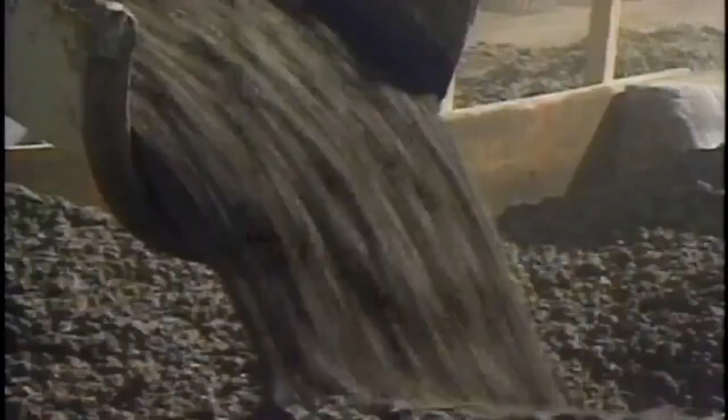Concrete. It's the most used building material on Earth. It was the building block of the Roman Empire. Today, it's the material for a new generation of gravity-defying skyscrapers. The raw ingredients that create this magic formula can be found in nearly every country on Earth.

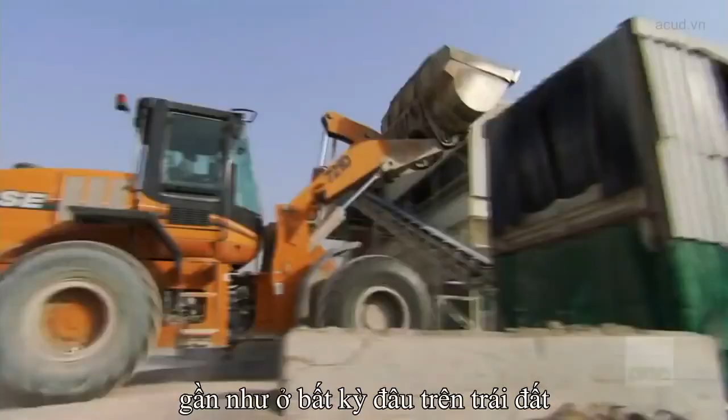Yet how these simple components are mixed together can make the difference between tragedy and triumph. From the mundane to the massive. From the ordinary to the extraordinary. Concrete helped pave the way for innovation and laid the foundation for the world's greatest civilizations. Now, go inside the science of concrete.

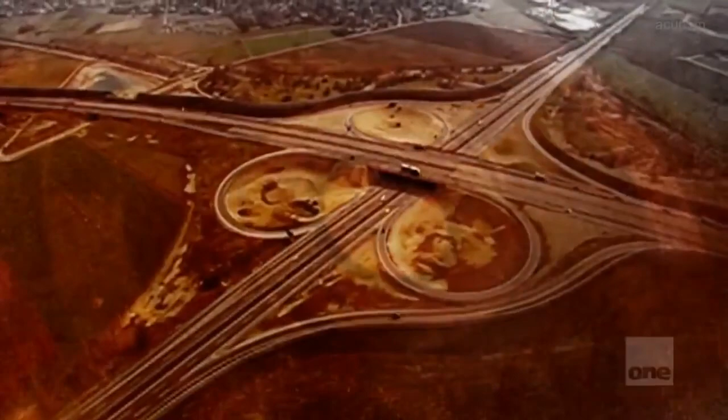It starts out like liquid. When it dries, it becomes stone hard. This amazing metamorphosis has earned concrete the nickname liquid rock. It has served as a cornerstone of engineering for centuries. And it's a highly prized tool of construction for a reason.

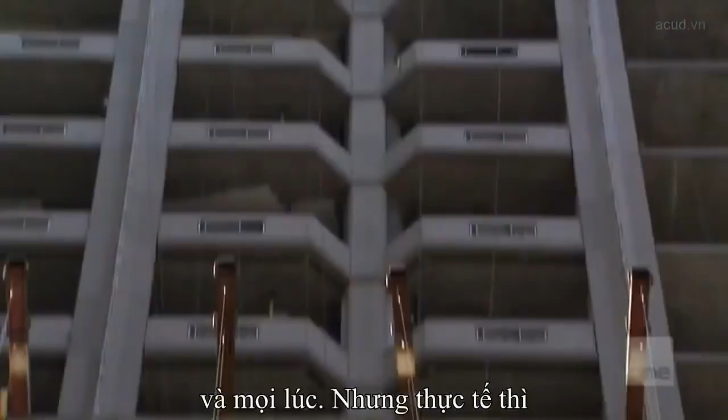It's easy to take concrete for granted. People see it in sidewalks and roads all the time, every day. But in fact, it is the closest thing to a miraculous material in construction that we've ever had. Concrete is everywhere. It has an almost unlimited engineering potential. It can take on nearly any shape and forms the backbone of a variety of the world's construction.

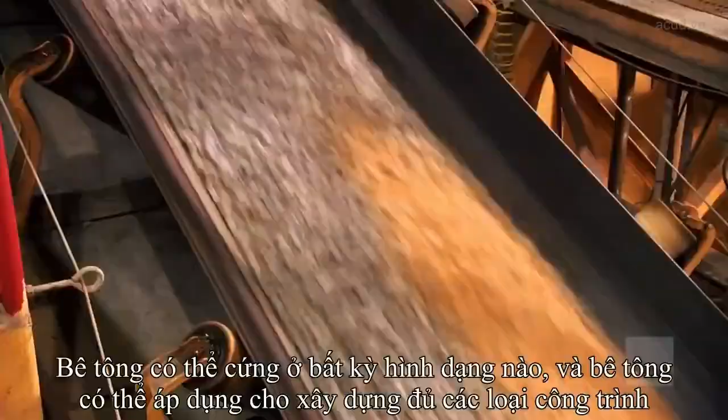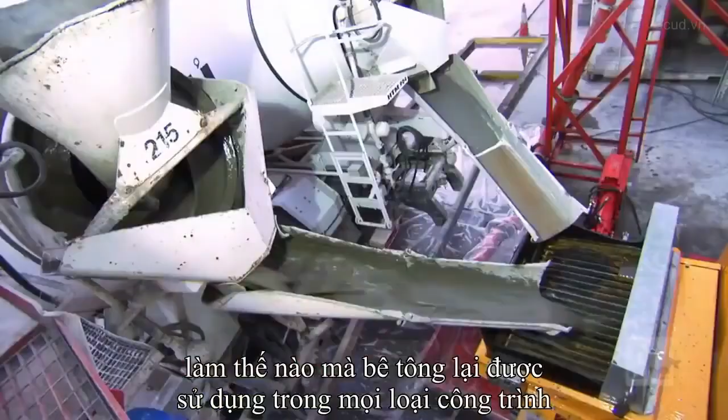Superhighways, massive bridges, man-made waterways, mega dams, the world's tallest skyscrapers. This miracle material begs the question, how does it do it all? I worked on a lot of jobs, and basically they all have a different formula for their concrete. Now I can't imagine the world without concrete.

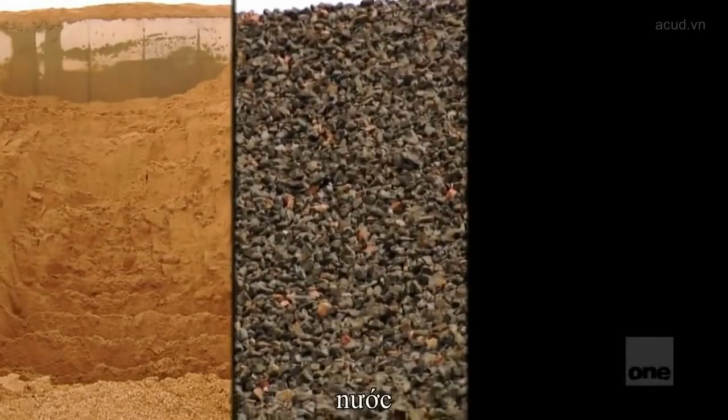The basic formula for concrete is simple. Sand, crushed rock, called aggregate, water, and the heart of the concrete mix, cement. Cement, it is the grey, powdery material that acts as a glue that sticks all of the concrete together. It covers and coats all of the gravel, the sand, and the rock as a way of gluing and binding the whole material together.

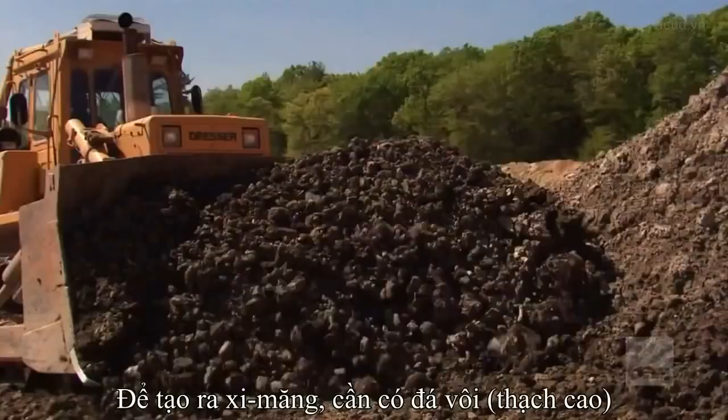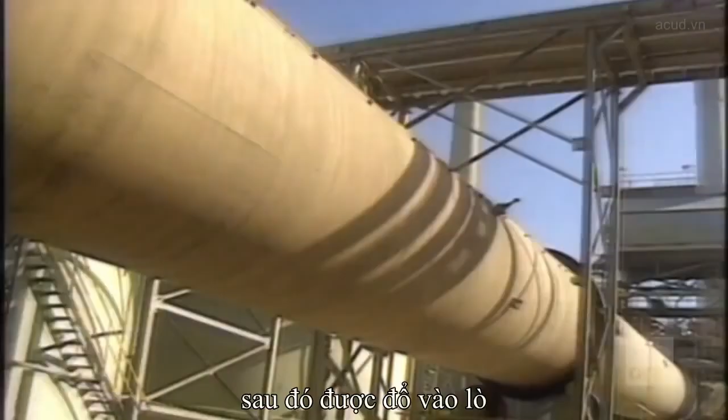To make cement, you need limestone, clay, and other elements like iron. These ingredients are crushed and combined into a powder that's poured into a kiln. The massive cylindrical spinning kilns heat the mixture to a temperature as high as 2,700 degrees Fahrenheit. The mixture becomes partially molten, forming a new marble-sized component called clinker. Once cooled, machines grind clinker into a superfine powder we know as cement.

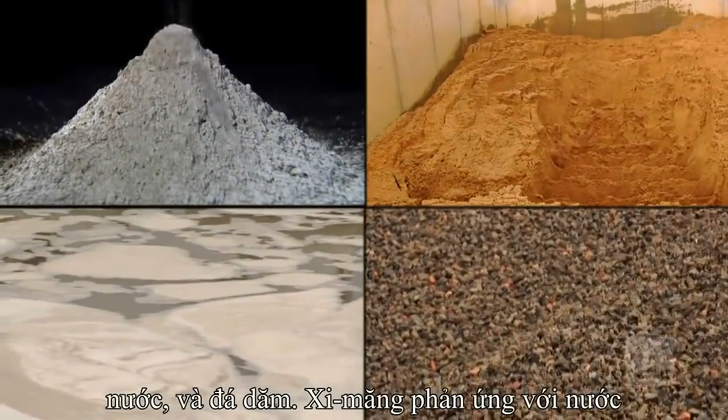Cement binds the ingredients together. When added to sand, water, and crushed rock, the cement reacts, linking the raw elements into one powerful whole. Water is the key. When cement reacts to the water, it undergoes a transformation called hydration. During this reaction, a node forms on the surface of each cement particle. The node grows and expands, linking up with other nodes. It sticks to the crushed rock and sand in the mix. Cement binds these ingredients. As it solidifies, concrete becomes a building block of modern construction.

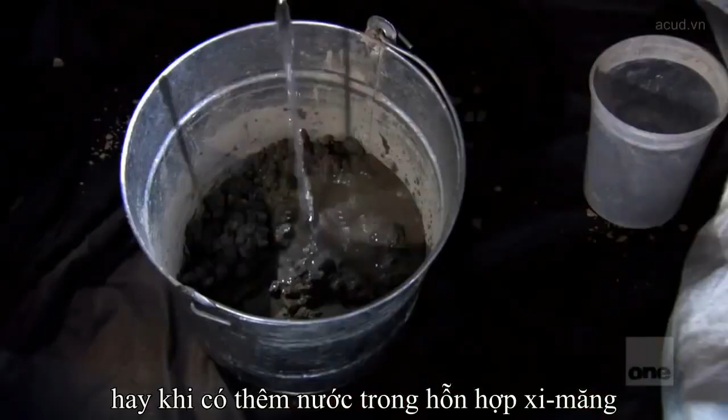The water actually allows a chemical reaction in the cement to allow it to harden. People often think that concrete hardens by drying. It actually hardens by hydrating or getting more wet. The water in the cement mixes with a lot of the minerals and chemicals that are in the cement, and by that mixture forms a new compound which then hardens. This basic process hasn't changed in over a century.

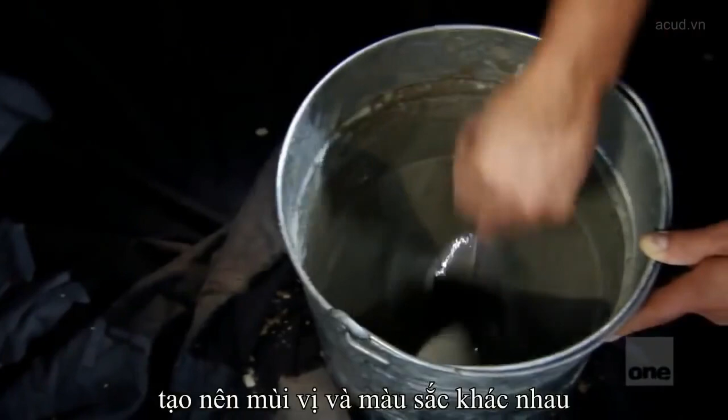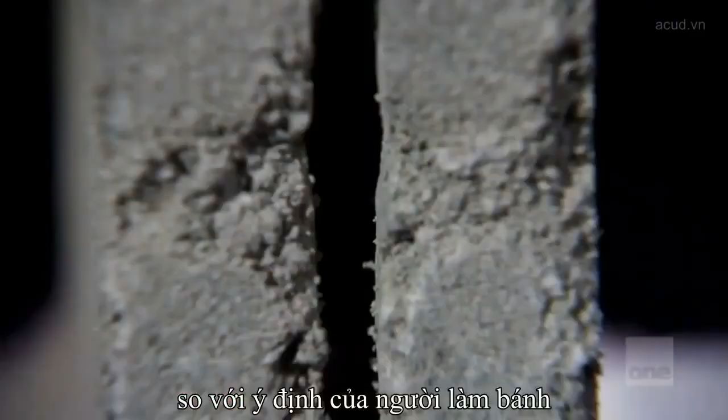But creating concrete is no simple matter. Making the right recipe requires precision and flawless preparation. It is a synergy of ingredients and timing. In a way, making concrete is like making a cake. There are lots of different recipes to make a cake. You get different flavors, different colors, different textures, but there are also lots of ways that you can make a cake wrong. It's not going to set properly, or it can come out in a way that's very different from your intentions. Getting the recipe right is everything, and the consequences of a flawed mix can be deadly.

The residents of Mexico City learned this the hard way. On September 19th, 1985, the Mexican capital is rocked by an 8.1 magnitude earthquake. It causes up to $5 billion in damages. Investigation of the rubble reveals that many of the buildings had been made of a substandard concrete.

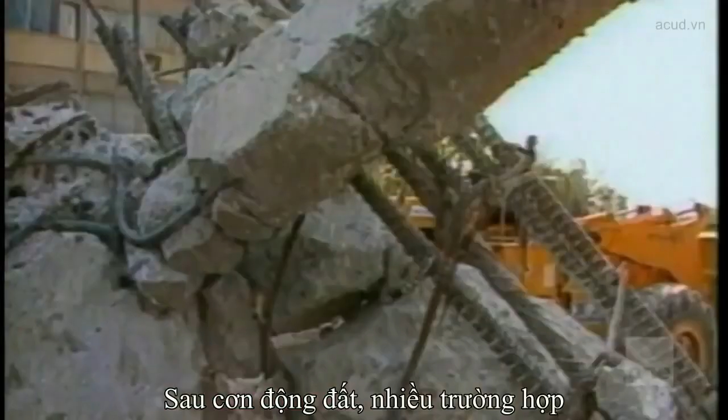Yes, we saw examples after the Mexican earthquake where when you use inferior concrete and you skimp on the rebar, and we saw both extensively in Mexico City, the concrete doesn't have its expected strength. The result is walls would fracture and shear and the building would collapse when the expectation would have been that the building should have easily survived to preserve health and safety. The consequences of this quake are tragic. An estimated 10,000 die. Another 50,000 are injured.

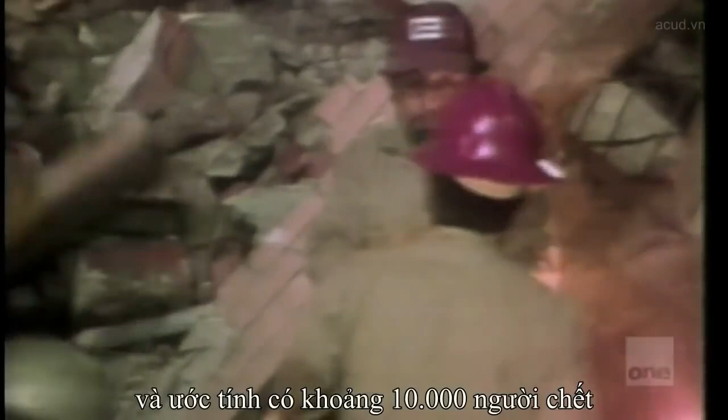But with the right formula, structures made of concrete can endure thousands of years. The ingredients for concrete have stayed the same for centuries. But there has always been room for innovation. With special ingredients and slight adjustments to the formula, concrete can adapt to the challenge of a specific project.

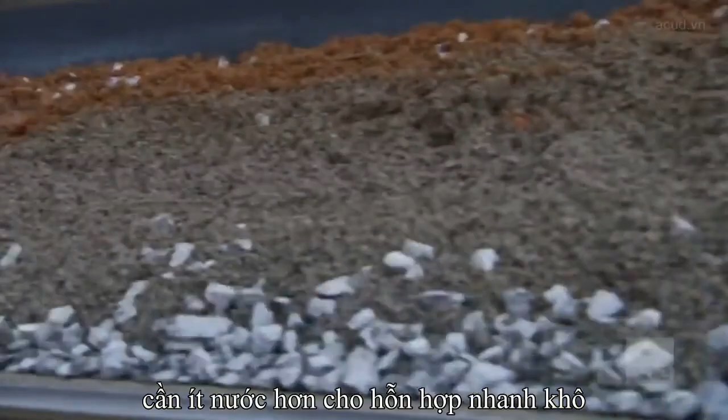Want a dam to hold back 52 million gallons of water? Add less aggregate to the formula to create a concrete with greater density. Want to create the foundation of an epic skyscraper? Add less water for a faster drying mixture. The array of different recipes is virtually infinite. The hunt for the right formula for a specific project is nothing new. The search for the strongest and most durable recipe goes back thousands of years.

Although other civilizations, including the Egyptians, experiment with concrete, the Romans transform it from a supporting material to a main substance. In Rome, liquid rock fuels the dreams of an empire. The word concrete even originates in Rome. From the Latin concretus, it means grown together or compounded. Roman concrete contains the traditional ingredients of sand, water, and crushed rock. But volcanic ash from the hills of Pozzuoli, Italy, transforms the material.

The Romans were very astute architects and engineers, and they recognized that by mixing volcanic ash from Lake Pozzuoli in Italy, they were able to get a concrete that became very hard. This volcanic ash proves to be an adhesive binding agent. It gives ancient Rome a powerfully strong concrete. This innovation allows the Romans to craft an empire from the ground up. Concrete becomes the backbone of a dizzying array of structures, aqueducts, bathhouses, and markets.

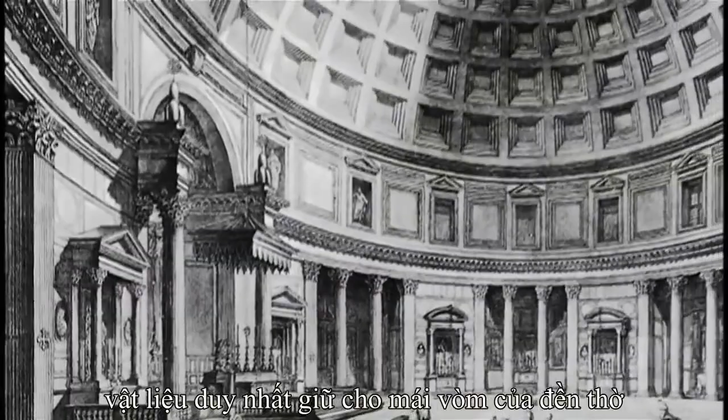This former temple to the Roman gods combines elements of engineering and design, and nowhere is that more apparent than in this concrete dome. Stretching 142 feet in diameter, it is the largest surviving dome from the ancient world. It was the largest dome in Western Europe until the 15th century. Unlike modern-day domes, which are generally reinforced, the only material holding the dome of the Pantheon together is Roman concrete.

Constructing an unreinforced concrete dome on the scale of the Pantheon is just an incredible engineering achievement. You couldn't do something today because everybody would have appraised the odds of your success as so small as you would never get a chance to do it.

There's actually 7 different types of concrete used in the construction of the Pantheon dome. And the way they distributed their aggregate and changed the composition of their concrete so that the areas that had to take tremendous compressive loads, like the weight of the dome at the base, the aggregate is huge, 9, 10-inch rocks. But as the dome gets near the top, of course, there's less weight, so they switch over to pumice. Near the top ring is very high pumice content, almost 80–90% pumice, to make it lighter. It is the Romans' ability to modify the formula for each stage of the dome's construction that allows it to stand to this day.

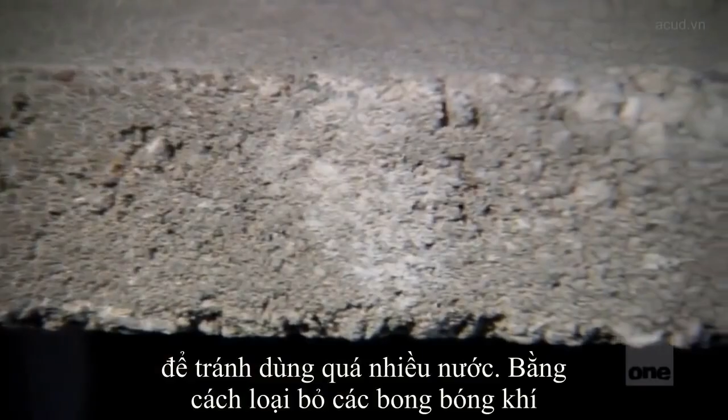The Romans also faced an immense engineering challenge: air bubbles. Pockets of air can form in the concrete during a pour. When the water dissipates, these holes can lead to cracking. To solve this problem, the Romans tamped or tapped the concrete, avoiding the need for excess water. By removing the air bubbles, the Romans increased the dome's strength and stability. The Romans also wanted to reduce the overall stress on the dome. To do this, they created sunken panels called coffers. These panels are decorative, but also take weight off the dome. They are a synergy of architecture and engineering.

However, there is one feature that stands out in the Pantheon's design. The dome's interior was designed to look like the Roman heavens. It features an interior circle called an oculus, or great eye, representing the sun. 27 feet across, the oculus is the source of all light for the Pantheon. The oculus reduces the amount of weight and stress at the center of the dome, giving the whole structure added durability and strength. It is an engineering marvel. The dome of the Pantheon is a stunning example of how Roman concrete could be built to last.

Each layer of the dome becomes less dense the closer it gets to the top. At its weakest point, the Romans designed an oculus which reduced weight and stress. These innovations continue to impress engineers almost 2,000 years later. For 1,500 years, that was the largest dome ever built by man. There aren't many engineered structures that stand that kind of record of time.

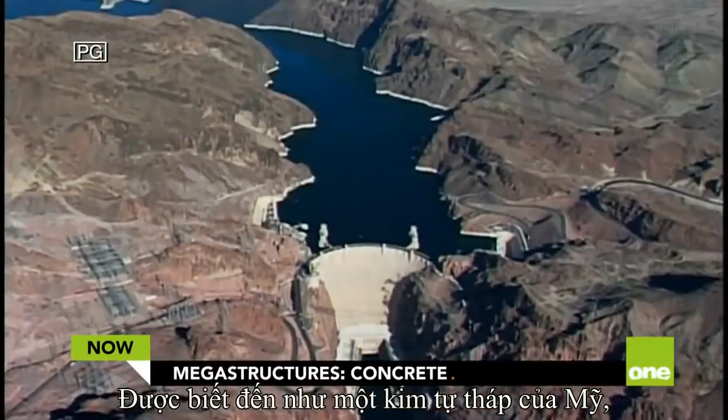It has been called an American pyramid. The mighty Hoover Dam is a testament to the power of concrete. Weighing 6,600,000 tons, this concrete colossus holds back 45,000 pounds of water per square foot. The force of this water generates hydroelectric power for over 1 million people. From the neon lights of Las Vegas to the freeways of Los Angeles, this hydroelectric dam generates 2,080 megawatts of electricity.

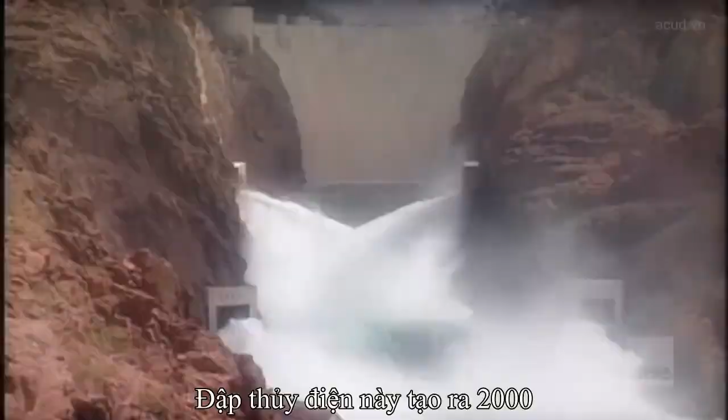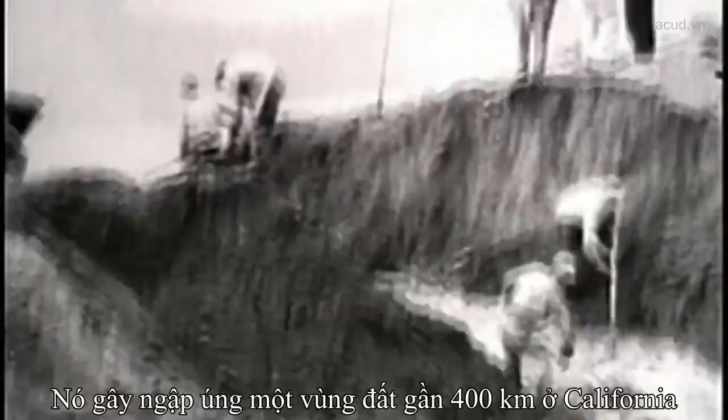The Hoover Dam's construction redefined what the world could do with concrete, but it also rerouted one of America's greatest rivers, flooding ancient canyons, reshaping the area's natural habitat. In 1905, the Colorado River breaks free of a man-made canal. It floods Lower California across 150 square miles. Epic floods wipe out thousands of farmers. Millions of dollars are lost. The Colorado is unpredictable.

The Southwest also has another problem: power. The boom towns of Los Angeles and Phoenix are growing at a rapid rate and desperately need energy. Raging floods and lack of power. Two different problems. But engineers believe there is one answer to both: dam the Colorado River. A hydroelectric plant would harness the natural power of the Colorado and, using simple mechanics, convert that energy into much-needed electricity.

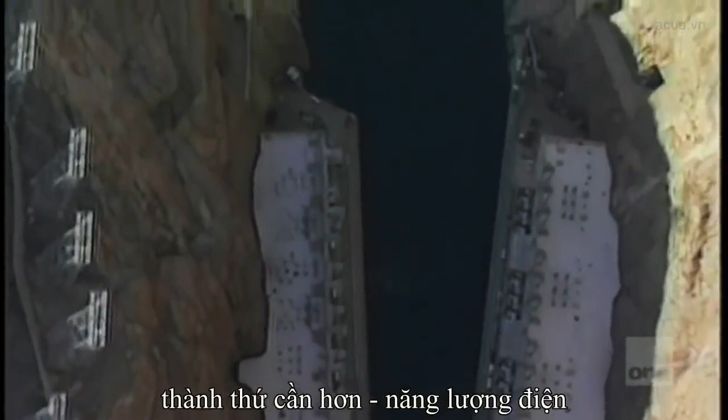You're generally looking in the construction of a dam for a huge, solid structure. It's really about holding back enormous quantities of water. The dam needs a material that is strong enough to hold back the raging Colorado. And since the location would be remote, able to be made on site. One material can meet all of those requirements. It's hard to imagine the Hoover Dam being built out of any material other than concrete. Using steel on this scale would be too costly.

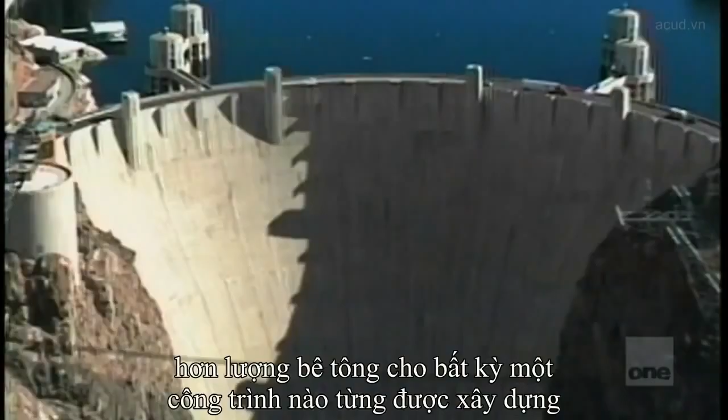But to make the Hoover Dam, engineers would need more concrete than had ever been used before in one project. The dam will be 726 feet high and 1,244 feet wide. With a structure this big, it will be impossible to do one massive pour of concrete. The amount of material that went into this dam was so enormous that there's no way to pour the concrete in one segment. So what they did is they divided the whole dam into lifts and then into individual blocks.

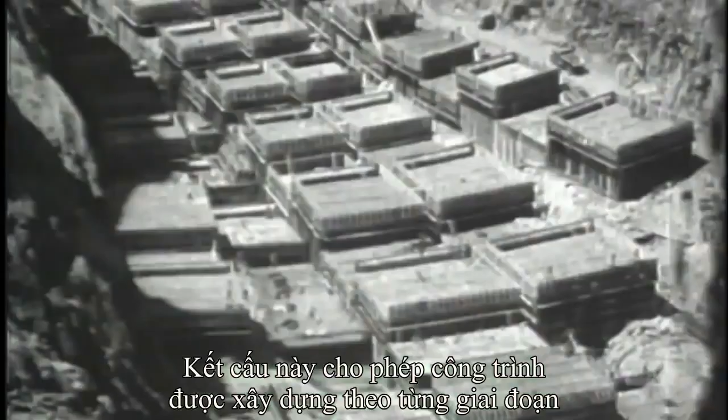The Hoover Dam needs to be built as a series of individual blocks that will interconnect. Trapezoidal in shape, the blocks rise in 5-foot lifts. This crucial engineering element allows the project to progress in stages. Something on that scale being built in concrete had not been built before. Hundreds of pounds per square inch, thousands of pounds per square foot on the base of the dam, trying to push the dam downriver. And now you've got the Hoover Dam to withstand this incredible water pressure trying to push it down the river.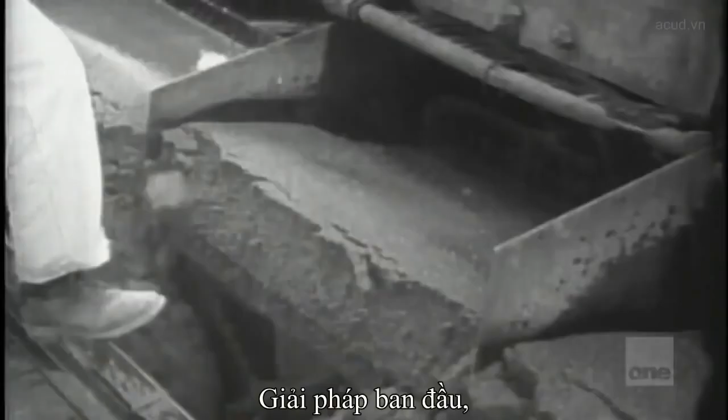Chief Engineer Frank Crowe knows the completed dam will have to hold back 45,000 pounds per square foot of water. For this, they need a special high-strength formula. Crowe's solution? A minor but crucial modification to the standard concrete formula. A very dry mix, one that uses less water. More water makes it more workable, but shrinks more, and shrinkage causes cracks. The less water, down to 7%, the better and stronger the concrete.

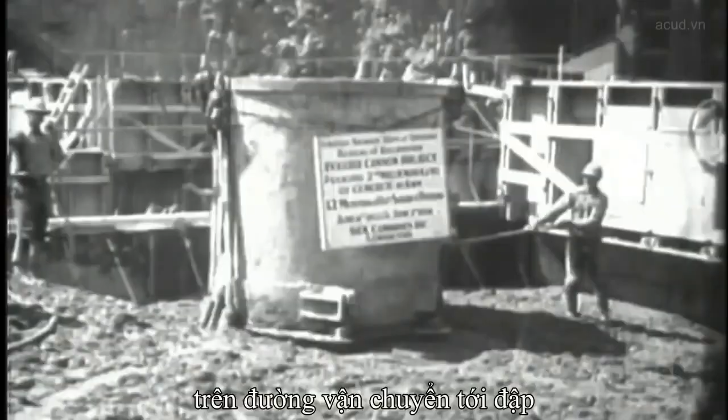The dam's remote location also means crews will have to build 2 concrete mixing plants on site. Shipping a very dry concrete formula from a facility far away would render it useless by the time it's transported to the dam. Because speed is of the essence when working with a very dry concrete mix, the crews working the pouring cranes have to push themselves to the limit to pour quickly and accurately. Now go back inside the science of concrete.

The process by which concrete cures, we call an exothermic reaction. By that I mean it gives off heat. And indeed, if someone pours a sidewalk or driveway around you, right after the slab dries enough to touch, put your hand on it. It'll feel warm. That's exothermic, it gives off heat. You can feel sensible heat.

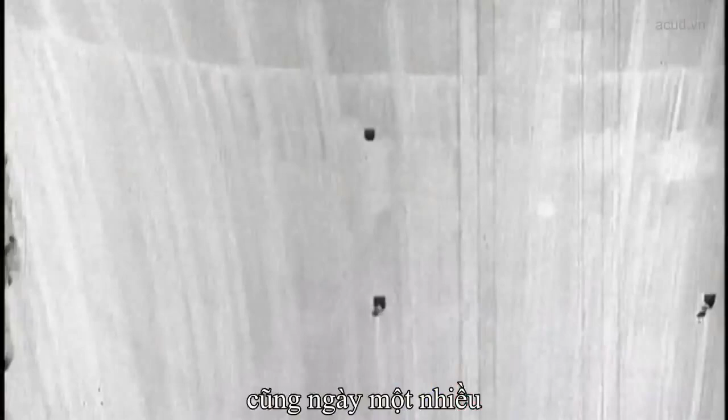As the amount of concrete going through this chemical reaction gets bigger and bigger, the amount of heat that's given off gets bigger and bigger. Engineers calculate that if the dam were built in one continuous pour, the concrete would get so hot that it would take 125 years for it to cool to normal temperatures. The extreme heat would also cause the concrete to crack and crumble away.

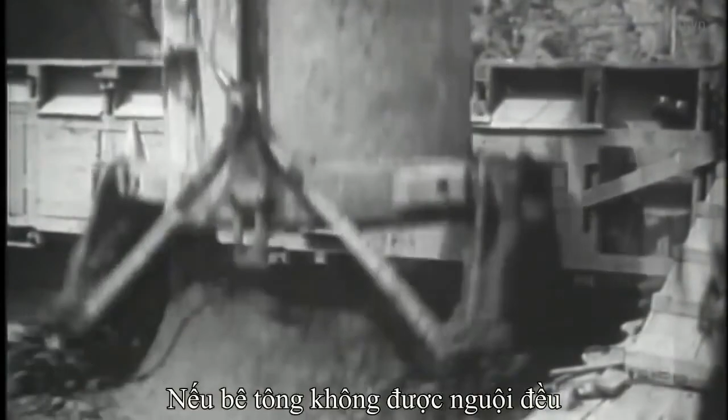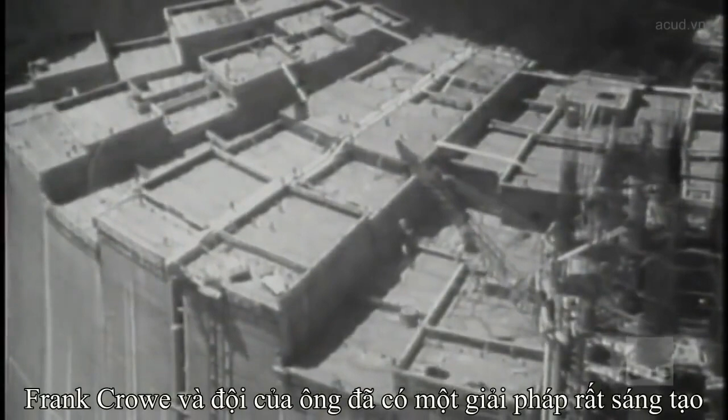Concrete dries from the outside in. If the concrete is not evenly cooled, it can crack, putting the stability of the whole structure at risk. Instead, Frank Crowe and his team of engineers have an innovative solution. Each block is outfitted with coils of thin-walled steel pipe. When the concrete is first poured, water from the Colorado River circulates through these pipes.

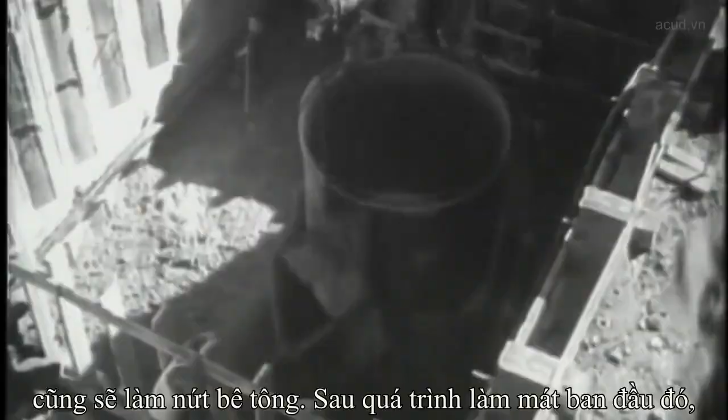The idea is to initiate a cooling process, but one done in stages. Cooling the concrete too quickly will cause it to crack. After the concrete has received its initial cooling, chilled water from a refrigeration plant is circulated through the coils to finish the cooling process. As each block is cooled, the pipes are cut off, and they are filled with grout by pneumatic grout guns, pumping 300 pounds per square inch of filler.

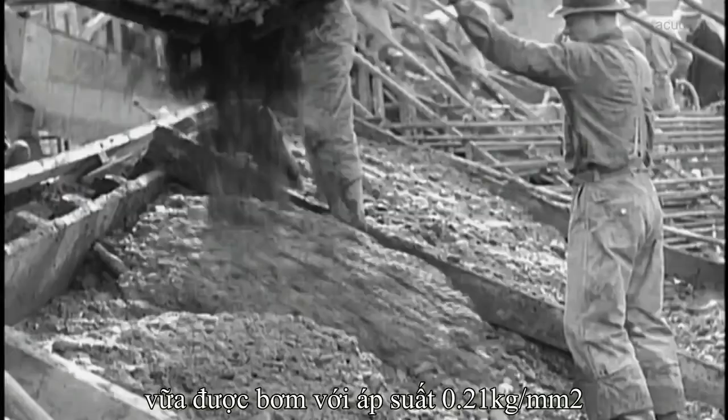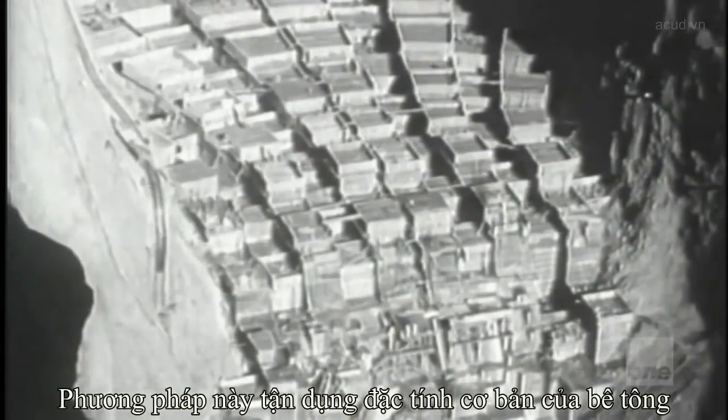Once the individual blocks have cooled and set, there is one final challenge. In order to prevent the hairline fissures between the blocks from weakening the dam, the individual blocks are formed with vertical interlocking grooves. When the concrete has cooled, grout is forced into these joints, bonding the entire structure into a monolithic concrete giant. This method takes advantage of one of concrete's fundamental properties. Concrete as a material is very strong in compression.

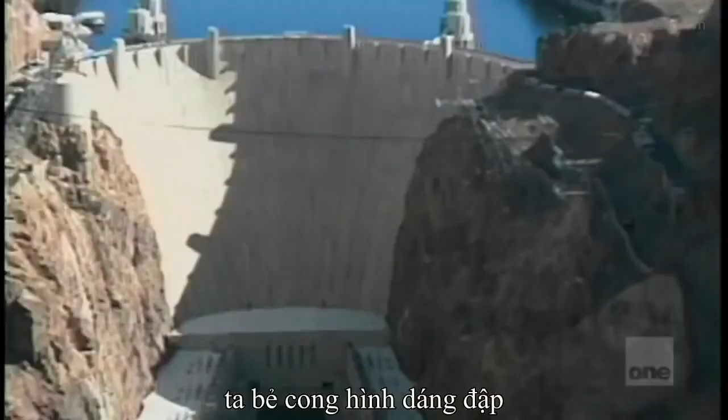To build a structure, to make sure that the concrete is all in compression, you bend the dam like this, so now the water pushes on an arch. Well, what's the water trying to do? It's trying to push that through. Well, it's the Pantheon dome again. Only this time it's the water trying to do it. It's trying to push the dome through the river gorge. What that does is put the whole structure in compression. Well, concrete loves compression. The more it is forced together while setting, the stronger concrete becomes. As a result of this property, the Hoover Dam is arguably stronger today than it was on opening day, 70 years ago. The Hoover Dam is a testament to engineering know-how and a skillful use of concrete.

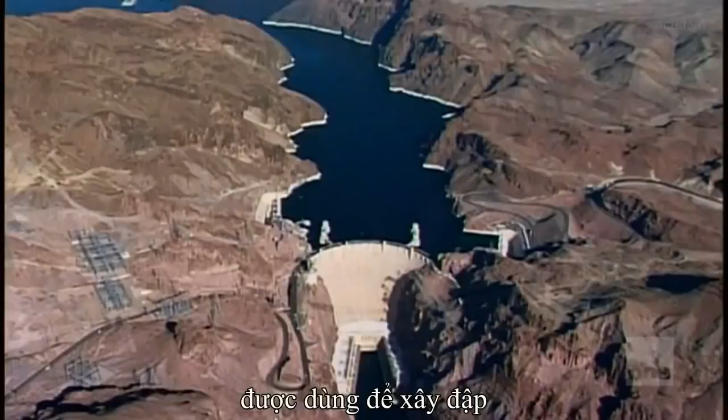The dam contains enough concrete to pave a strip 16 feet wide and 8 inches thick from San Francisco to New York. More than 5 million barrels of cement were used in the Hoover Dam, and a total of 21,000 men worked on its construction. And it represented an enormous engineering achievement to build successfully. It took the lives of over 100 men to build that dam.

Today, the concrete mega dam is nothing new. But Hoover set the stage and showed the world that concrete could do the job and help generate much-needed power. It changed the course of one of America's wildest rivers. Now the question is, can concrete conquer the skies? Now go back inside the science of concrete.

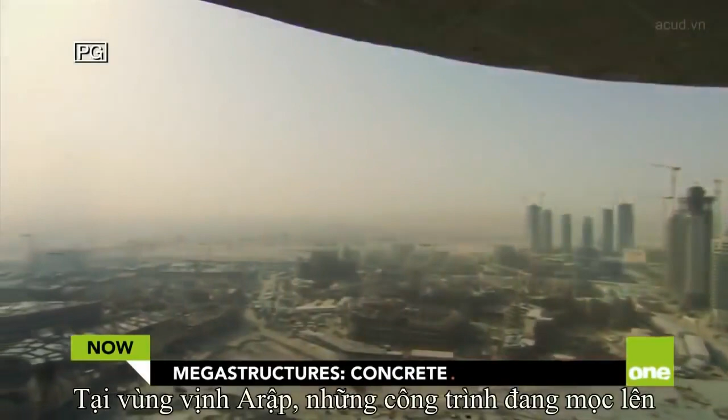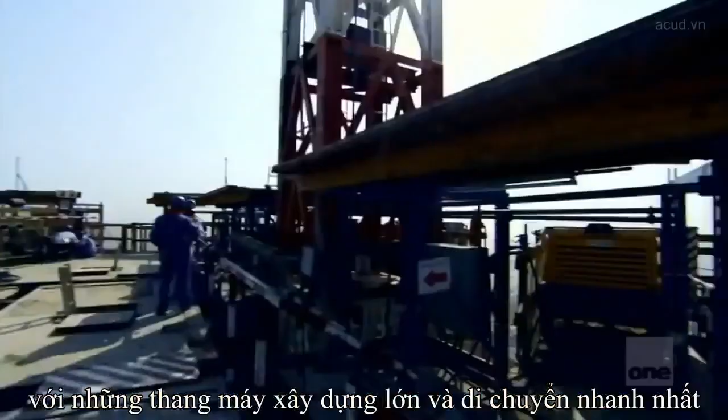In the scorching Persian Gulf, a growing structure cuts the horizon. Its expected height is a closely guarded secret, but experts around the world agree the Burj Dubai may be the world's tallest skyscraper. It'll be the tallest building, for sure, the overall title holder for some time to come. A construction project this massive needs 11 cranes and the world's fastest high-capacity construction elevators. The building rises at the breakneck pace of 1 floor every 4 days.

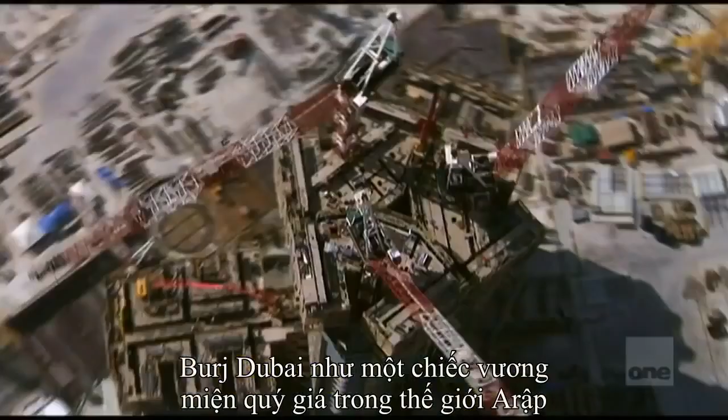And from the walls to the floors, to the columns to the stairs, much of this desert skyscraper is concrete. More than 160,000 cubic meters of it. At more than 2,000 feet, the Burj Dubai will be the crown jewel of the United Arab Emirates and is a shining example of a new generation of skyscrapers that seek to dominate the skies. It is a far cry from the humble beginnings of the concrete skyscraper, more than a century ago.

At the beginning of the 20th century, the building material of choice was not concrete, but steel. You can build a hell of a skyscraper with steel. In fact, the Empire State Building is so overbuilt, you could probably add another 30 stories to it under today's building codes, and it would still comply fine. So steel was a great material. You can build a great building from steel, but it's an expensive way to go.

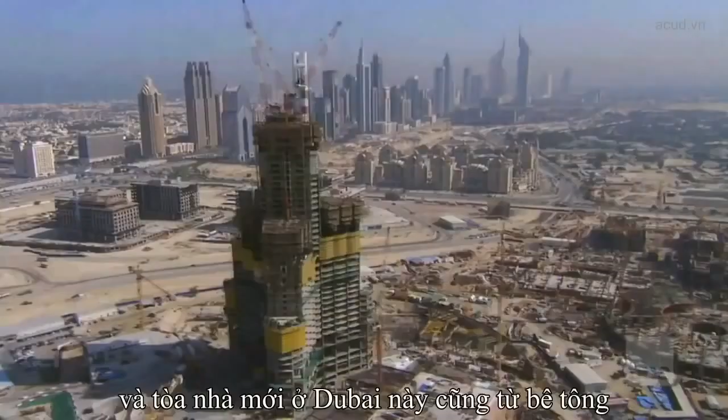And steel is not only costly, but represents a challenge for a new generation of skyscrapers that grow increasingly higher. And if you're going to go tall, the building's got to be stiff. It is so much easier to make those thick, stiff walls from reinforced concrete than steel that it's a no-brainer. The Petronas towers in Malaysia are concrete, and this new one in Dubai is going to be concrete. If you're going to go that high, it's going to be concrete.

The stiffness of concrete, combined with its availability and relatively low cost, have made it the building material of choice for these new skyscrapers. As our experience and comfort level with reinforced concrete came along, and as the buildings started getting taller, reinforced concrete really became the material of choice.

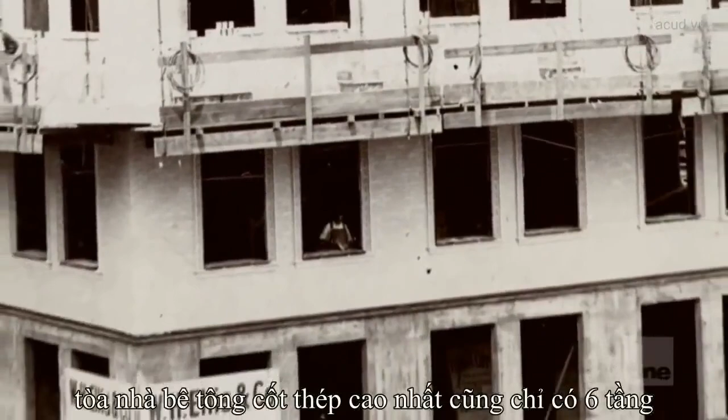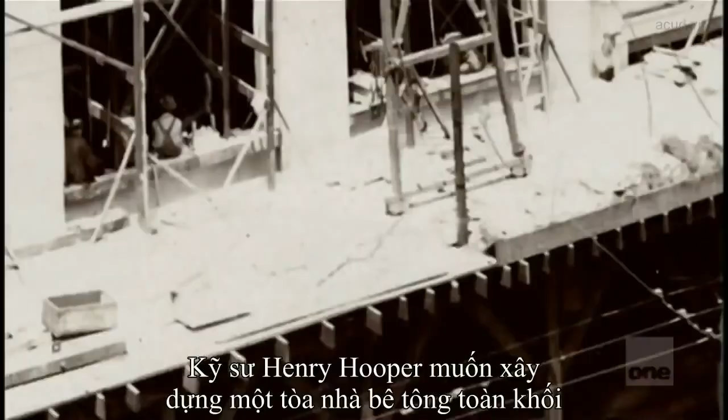Before 1902, the tallest steel reinforced concrete building is a paltry 6 stories tall. The Ingalls building in Cincinnati changes that. Engineer Henry Hooper dreams of a monolithic building of concrete, a skyscraper 16 stories tall. But many engineers believe that a concrete tower 16 stories high will collapse under strong winds or even its own weight. When Hooper finishes his building, there are many skeptics.

There's one anecdote that says that a reporter actually stayed up all night waiting for the Ingalls building to collapse because he was so certain that it was going to. Needless to say, the reporter was disappointed in the end. It is a towering success for its time. But at 180 feet, it is just one in a dizzying array of modern-day skyscrapers. More than a century later, the towering dream of Dubai aims to be over 10 times the size of the Ingalls building.

Every morning, workers assemble in the garage of the building. Erecting this much concrete in the punishing heat of the Gulf requires serious manpower. But before workers can pour a drop, the perfect formula needs to be mixed at the batch plant.

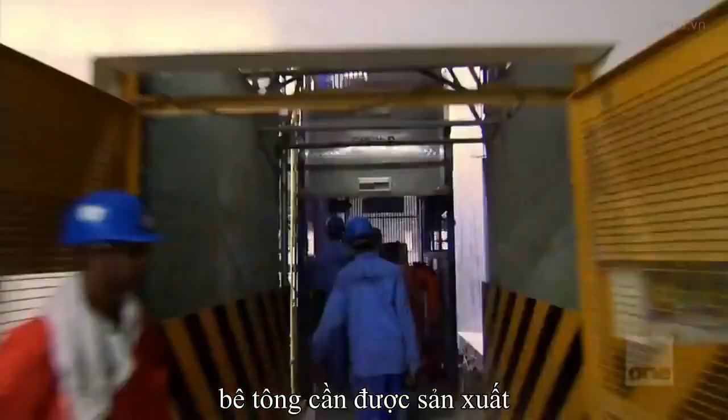The first problem this leviathan from the desert faces is its own height. The taller a building, the more it flexes, increasing the likelihood that it could flex to the breaking point, a deadly proposition. Older skyscrapers like the Empire State are safe because they use massive steel beams and braces. But erecting a tower nearly twice as high requires a material with even greater shock-absorbing qualities.

If you take something like the Empire State Building and the wind blows on the Empire State Building, well, the wind creates pressure, which are going to try and bend the Empire State Building over. But as you go higher, imagine now going twice the height of the Empire State Building. The wind gets more surface to work on. Indeed, buildings collapse when the flex is so great that the weight of the building gets outside of its footprint and the building doesn't have strength enough to handle that. Down it comes. Now go back inside the science of concrete.

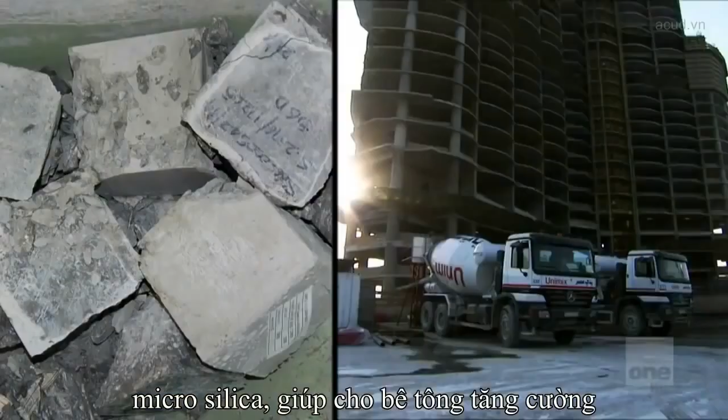Builders will need a formula that is almost as strong as cast iron, yet more resistant to damage due to vibrations from the wind. After extensive computer and wind tunnel testing, the architects behind the Burj Dubai will use a high-strength concrete formula. It contains slag, a byproduct of the steel industry, and microsilica, which gives the concrete added strength.

If you look at the microstructure of concrete, there are many, many spaces between the particles that are either hollow, so we call them pores, or they are filled with water. Microsilica plays the role of filling these pore spaces, and therefore it makes concrete much more dense, more durable, and stronger. And in order to make sure that the formula is consistent, Alam Feroz, quality control manager for the concrete of the Burj Dubai, routinely tests the concrete before it is used in the skyscraper.

I'll give you an example. It's like if you're giving blood to a patient, so how important is the blood to be tested before you give it to the patient? It's a big risk. So same is with the concrete. When it has been tested, I get confident that whatever I'm giving to the structure, it's been tested and it complies to the requirements. It won't be just a mere guess.

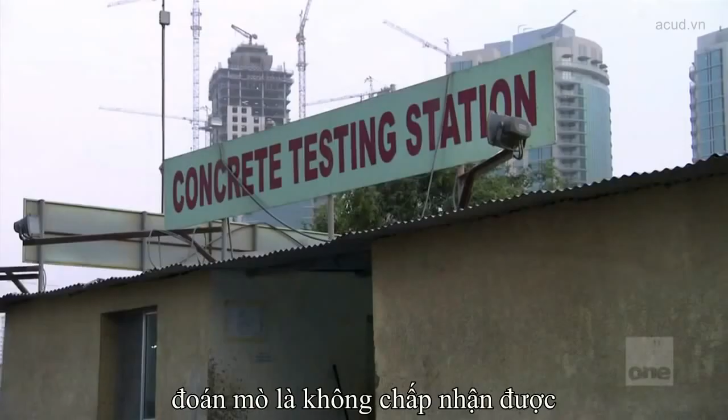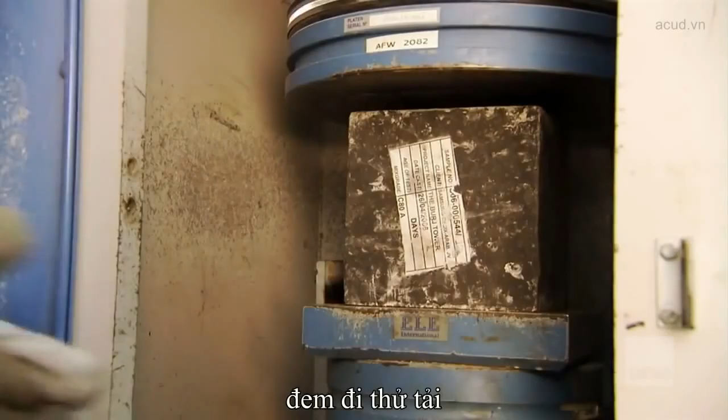To test the strength of the concrete, small cubes are hardened in cool water. Next, the concrete is deposited into a crusher for a stress test. This cube holds up to nearly 14,000 pounds per square inch, making it a high-strength concrete. The concrete test has been successful. But as strong as this formula is, it still has to contend with desert heat.

Temperatures top 120 degrees. How do you keep concrete cool in the desert? Builders use a deceptively simple technique. Shaved ice. While it's being mixed at the batch plant, slices of ice are mixed into the concrete so that it remains cool inside of the mix trucks. When it arrives at the building site, the melted ice has kept the concrete from overheating.

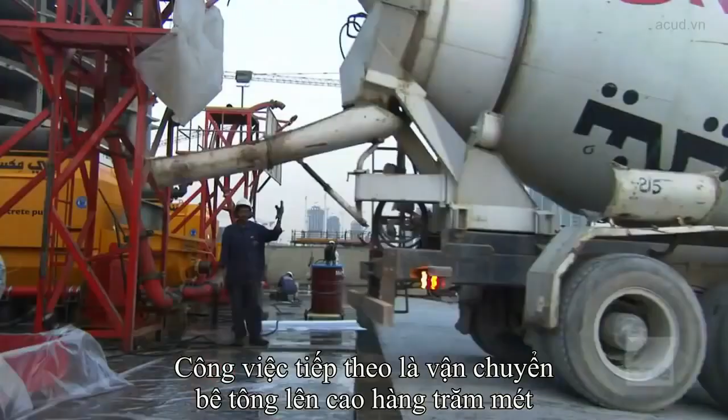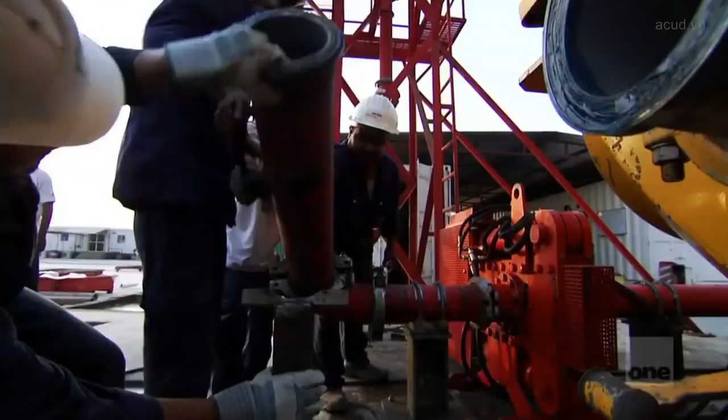But now, the concrete has to travel hundreds of feet into the air. The key technical problem for building a building of this size and of this height is going to be to vertically pump concrete of the order of 2,000 feet high. It takes huge amounts of pressure. Mixer trucks deliver the mix to the pumps. The building requires 3 pumping stations where the liquid concrete is poured. The high-pressure pumps force the concrete through a complex system of pipes.

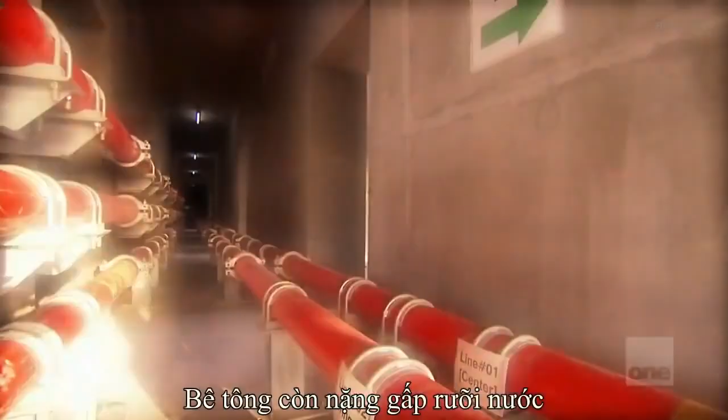Now, the technology to do so is awesome. If you think in terms of water, you have 1,000 feet of hydraulic water pressure. That's a tremendous kind of pressure. Now, concrete weighs 2.5 times as much as water. So you need a piping system that's so much stronger, and also pumps that are so much more efficient to pump concrete up that high.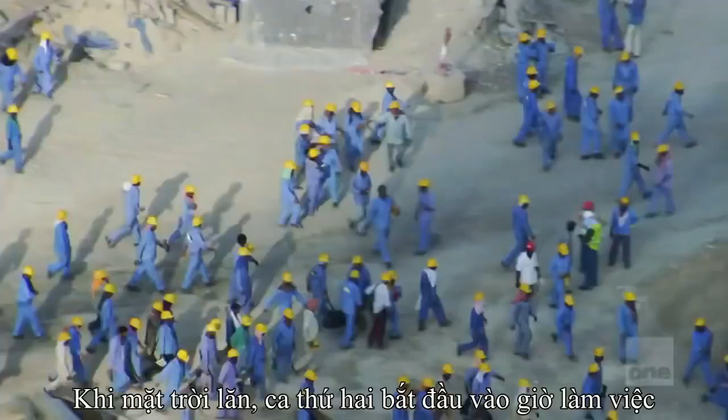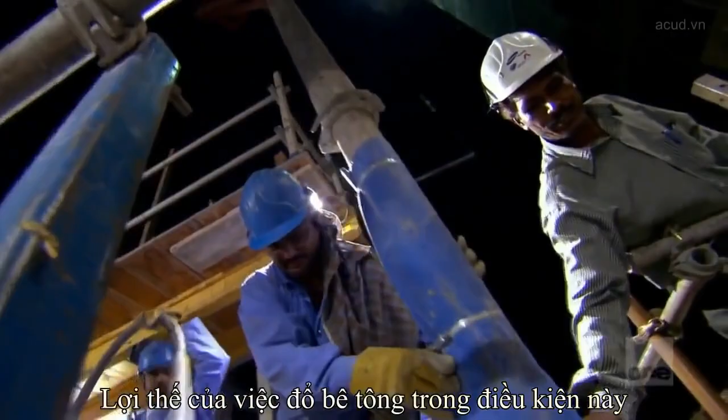As the sun sets, the second shift workers return to feed this growing skyscraper. The concrete pour takes place at night so that the concrete can harden evenly. At the moment, even though it's 10 o'clock at night, it's about 100 degrees Fahrenheit, and the humidity is about 90%. The advantage of pouring concrete in these conditions, because the humidity is so high, we don't have a problem with it drying out the top surface of the concrete, but we've got effectively another roughly 130 stories to go.

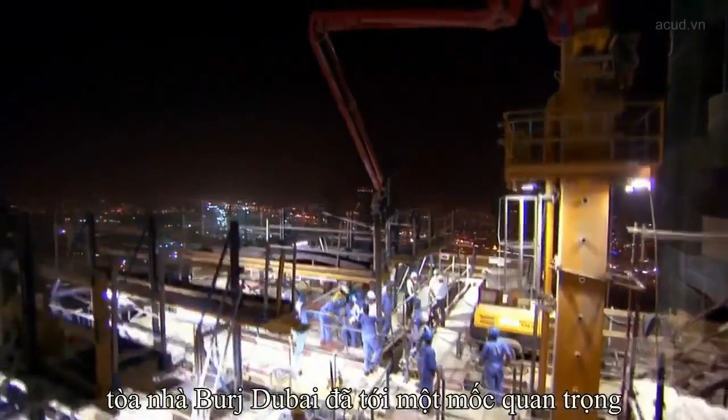As the pour continues into the night, the Burj Dubai has reached a milestone. 25% of the building is done. When completed, this megastructure will stand over 2,000 feet tall, making it twice as high as the Empire State. It will be covered in a reflective glaze to protect it from the extreme heat and high winds of the Gulf. But the building's guts are solidly concrete. When it's finished in 2008, the Burj Dubai will be the tallest building in the world.

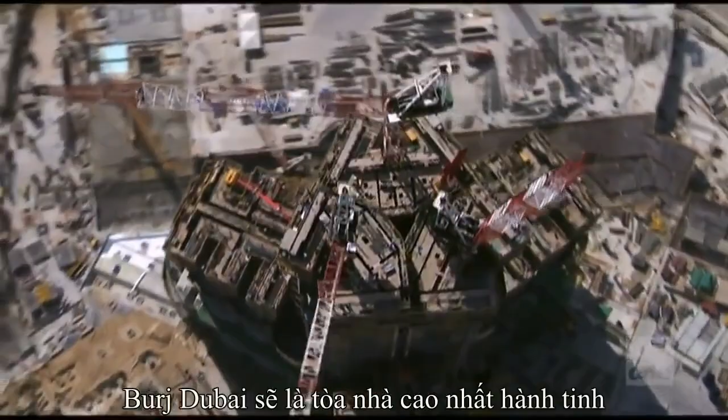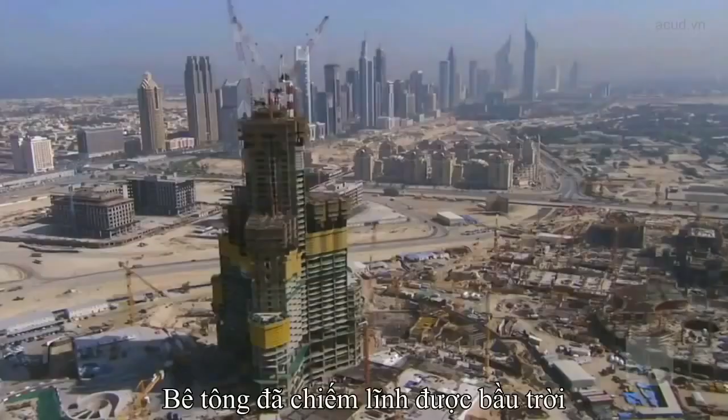Like the Ingalls, the Burj Dubai has set the standard for its day, showing once again that concrete can be used in a variety of ways for the world's tallest buildings. Now, reinforced concrete is establishing itself as a building material of choice for skyscrapers. Concrete has conquered the skies. Concrete's next quest, how to tackle the building challenges of the future. Now, go back inside the science of concrete.

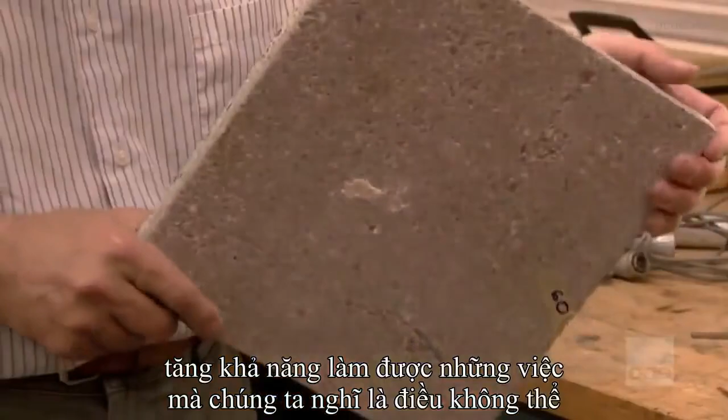Concrete has been a key ingredient in the construction of our civilization. It has been a fundamental part of our architectural past and is now paving the road for our future. Scientists are developing new formulas for concrete and are looking for ways to make it stronger, more environmentally friendly, and capable of doing things we never thought possible.

Back where it all started, at the heart of the Roman Empire, concrete has taken a new and exciting turn. Just a few miles from the Pantheon, the Jubilee Church, designed by architect Richard Meier, uses a new form of concrete. The church was commissioned by the Archdiocese of Rome to commemorate 2,000 years of Christianity. For that, the building would need a material that was both ancient and modern, a material that would speak to the church's past and make a bold statement for the future. They would also need a material that would last the test of time.

Concrete fits the bill. This church is remarkable for several reasons. It has these three sail-like forms, loosely representing the Holy Trinity, but made in effect of giant concrete blocks. The shells of the church, which stretch out and up in the same way as the Sydney Opera House, are made of 346 white, reinforced, precast concrete blocks.

Concrete, for all of its advantages, does tend to pick up discolorations from the atmosphere and so on. Meier, though, wanting to keep his building white, managed to work with local firms in order to achieve this concrete mix that included these photocatalytic particles that will absorb and neutralize the acids in the air. And in effect, what you'll have is a pollution-eating building. Italcementi came up with a revolutionary new formula for the concrete that will keep it as pristine in 50 years as it was on opening day.

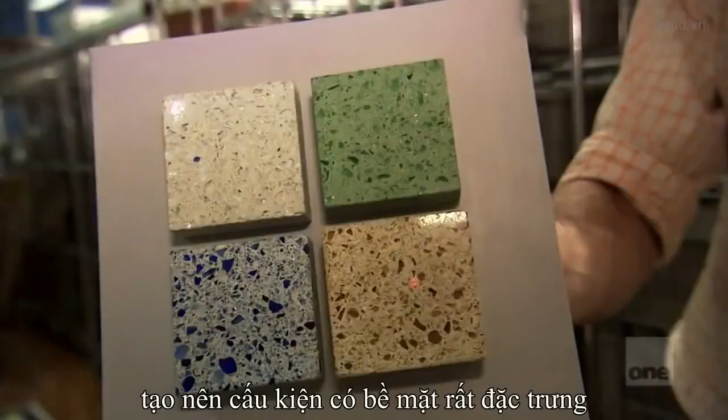We are generating millions of tons of garbage, solid waste, and in New York City, approximately 6% of all solid waste is glass. That's bottles like this, yeah? And these bottles generally find their way into landfills. And that costs taxpayers hundreds of millions of dollars just to get rid of these bottles. Concrete's versatility allows it to bind with other materials, in this case, glass.

The first step is to separate the bottles by color. And then you crush them in a crusher. Now, crushed glass is not something like this. This is what we call broken glass, and that is something you want to handle very carefully. It has sharp edges, and that was also one of the problems we were facing, because skeptics asked, well, if you use glass in concrete, won't people cut their hands by handling the blocks or whatever?

Answer is no, because when you crush the bottles in a high-impact crusher, it comes out in pieces like that, and it's just like sand. It does not have sharp edges. Eventually, the broken glass is crushed into a fine powder. So this is just like powder, like baby powder, the same kind of particle sizes. So if you put this finely ground glass powder into concrete, you can replace part of the cement by this glass.

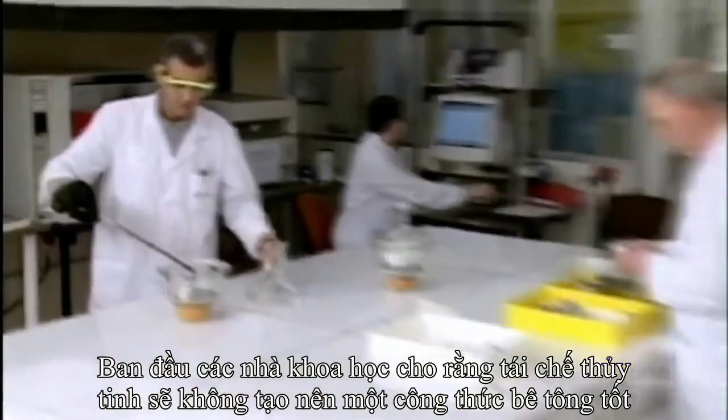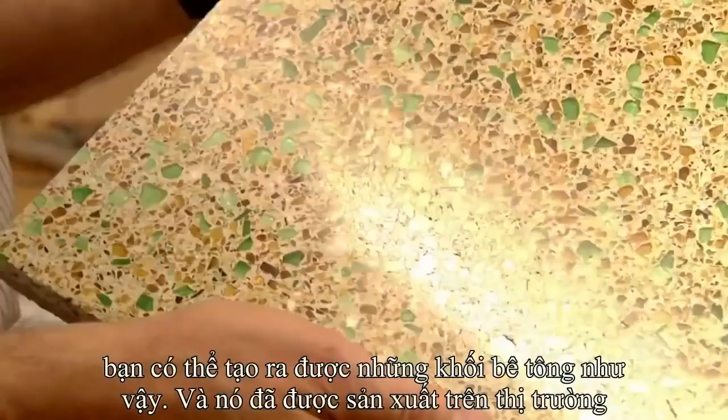These are actually 100% recycled glass pieces added into the concrete. Initially, scientists thought that recycled glass would make for a bad aggregate. But Professor Meyer and his team have found a way. Okay, so once you make concrete out of these glass particles and color coordinate that very well, then you can get something like this, and this is now already being commercially produced.

That's how regular concrete would look. And this here is our glass concrete, polished to a high precision, high grade of polishing. And that is known as terrazzo concrete. Using recycled glass as an aggregate is just one of the many ways that concrete continues to reinvent itself. It also may pave the future for a more environmentally friendly concrete.

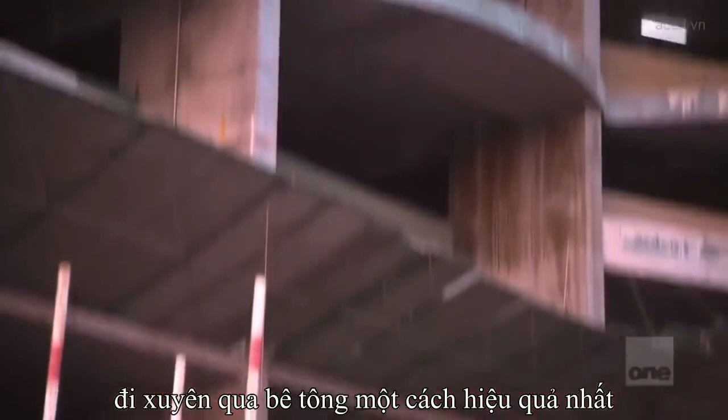There are also other developments reshaping concrete for the future. For the last 100 years, architects and builders have sought a way to allow light into concrete buildings, homes, and offices in a more efficient manner. One of concrete's biggest drawbacks is that it creates dark buildings that do not effectively conduct light. Experts are working to change this. Okay, this is a piece of light transmitting concrete. It seems like an odd concept, but what they've done here is to take standard concrete and add glass fibers.

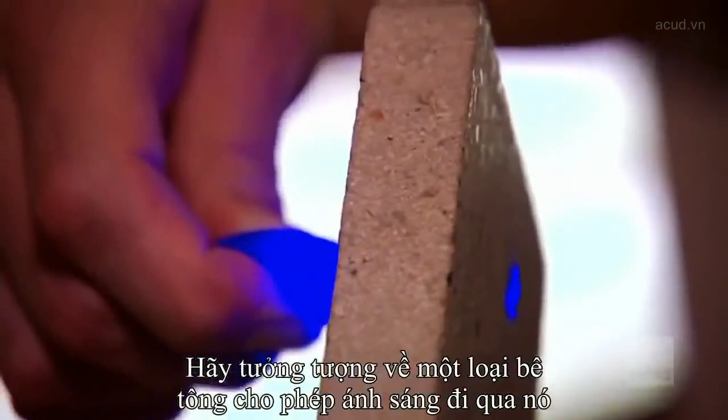Okay, so what you're seeing here is the blue LED passing through the glass fibers that are embedded in the concrete. Imagine concrete allowing light to pass right through it, or for someone to cast a shadow through a concrete block. The same thing can happen with normal daylight as well. So the idea is that you can build a structure with this concrete and allow daylight to actually come through the structural element of the concrete.

Light transmitting concrete, or LiTraCon, is a unique form of concrete that uses glass fibers to conduct light. It allows for massive structures to permit light to shine through. This technology has the potential to redefine what concrete looks like. Once considered cold and impersonal, these new forms of concrete are transforming the material. What started off as the most basic of building materials is now on the cutting edge of building and design.

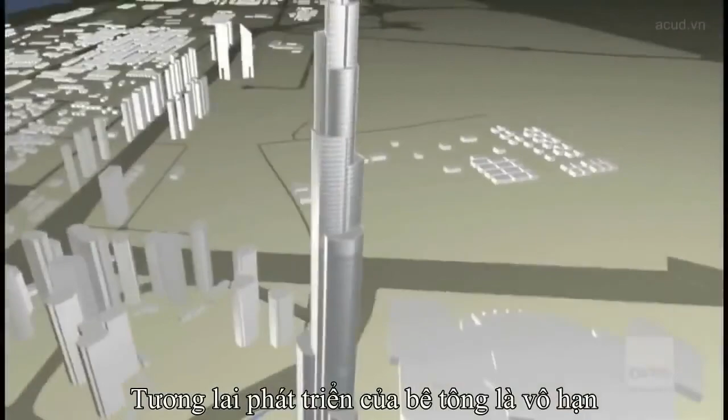The future for concrete is virtually limitless. If concrete is anything, it is a material that continuously reinvents itself. Concrete continues to adapt to the emerging challenges of our world and is laying the foundation for our future.